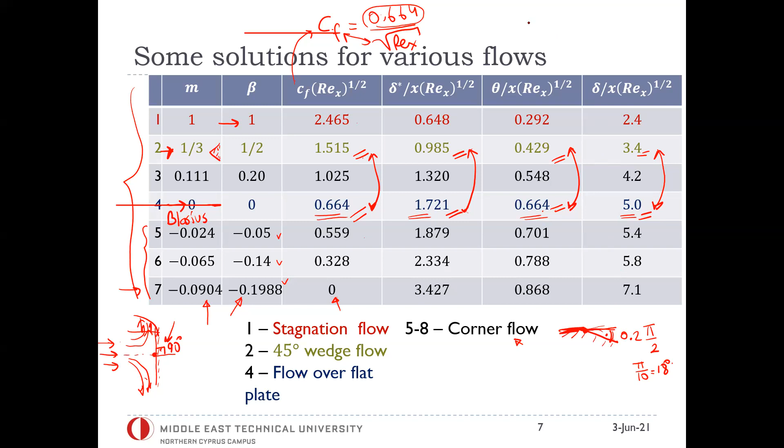Generally, when we are designing these types of corners or diffusers, for example, let's say we have this pipe, and then we would like to transition into a larger pipe, or larger channel. Now, of course, we have to connect them like that. So all these are kind of corner flows that we have here.

Generally, in a real life problem, it may or may not be laminar. It could be turbulent. Plus, there are more complications. So the general engineering rule that we use is that this half angle must be less than approximately 3.5 degrees. So the total deflection should be less than 7 degrees.

This is a much more restricted case compared to this one down here. But this is an engineering rule of thumb. So if you're in the business of designing different channels that are going to be connected to each other, and these are what we call subsonic diffusers, then we need to be careful about these corner angles and keep the total angle smaller than 7 degrees.

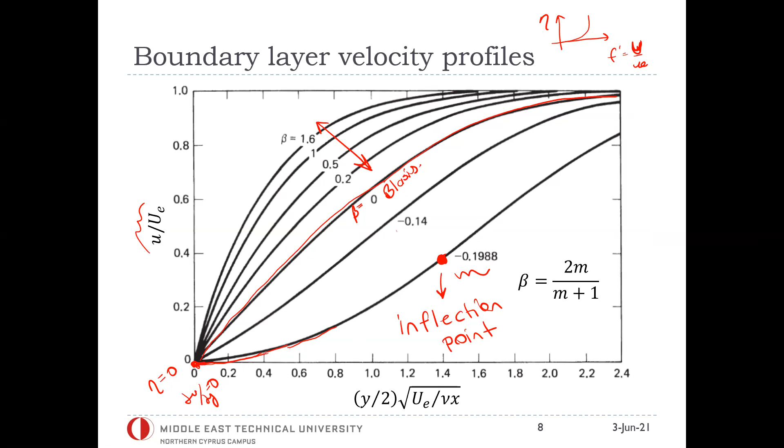Hocam, yes. I have two questions about the table in the previous slide. Hocam, in the beta and m equal to 1 case, we have the momentum boundary.

Theta? Yes. Momentum thickness. Is it low because the flow hits the wall and transfers momentum at maximum to the wall? I mean, theta is the momentum thickness, and therefore this function, theta over x times square root of Reynolds x, is a function, if you remember, telling us how theta grows over this specific type of boundary layer. Yes, how fast it grows. For example, if you compare the theta value of this flow with the theta value of the Blasius flat plate boundary layer, this is approximately half of Blasius. Which means that at a certain x coordinate, the momentum thickness theta will be half of what you would have on the Blasius boundary layer.

And the physical reason could be, let's say, very roughly explained as you explained. Yes, there is very strong momentum inflow coming, and there is a strong stagnation. You force the flow to go to zero velocity, and not only that, you force the streamlines to turn 90 degrees to the left and right, or to the top and bottom, and then the momentum gets distributed between these two. And the development of the boundary layer, I guess you can explain as you said: first a very strong reduction in momentum, and then regrowth of momentum.

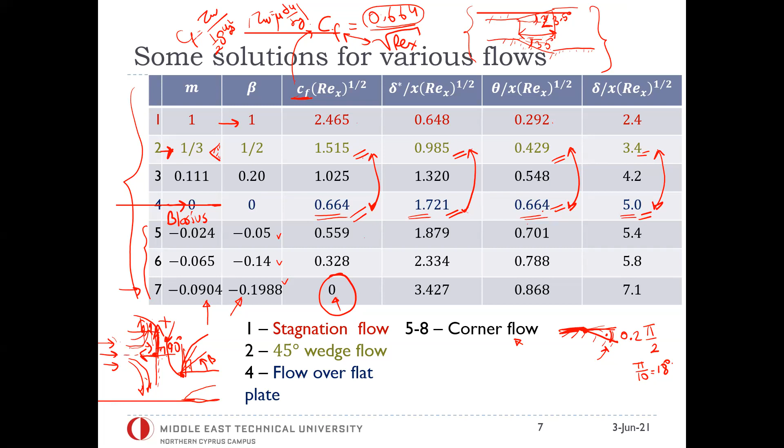My other question, hocam: in the tabulated CF values, after a certain m number we have CF as 0, and in this case the flow gets reversed at the wall. For this case, do we have CF as negative or continuously 0? After the separation point, let me go back here. After the separation point, the velocity gradient is negative, and therefore tau wall is negative. Therefore, CF is also negative. It doesn't remain at 0.

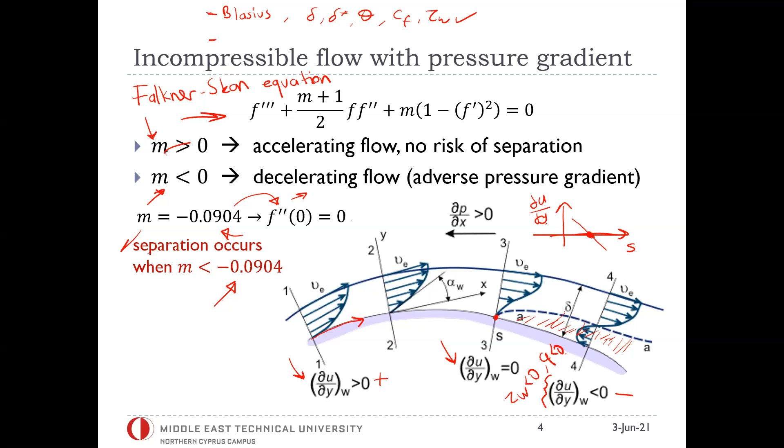Anyway, it's good that I'm on this slide right now to recap. We started with Blasius, and we extended it quite a bit with the Falkner-Skan equation, which is kind of a modified version of the Blasius equation. Based on this and on the introduction of the angle beta parameter, using a similar approach like Blasius, meaning after this coordinate transformation plus coming up with the similarity variable and the definition of the stream function, we now get this general equation, which potentially can represent all these kinds of laminar flows over all these different geometries.

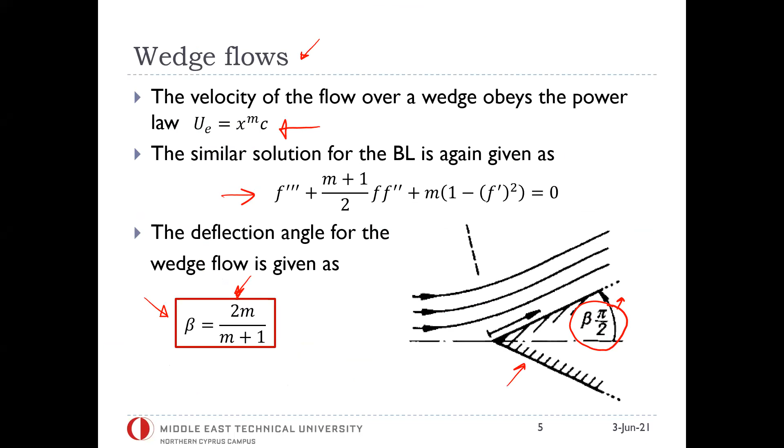For those cases, we generally use what we call integral methods for boundary layer analysis. So, what does that mean? From this point on, we will start learning integral methods. Until this point, everything that we learned was based on differential equations, right? First, reduction of the partial differential equation set to one single ordinary differential equation, and trying to obtain solutions for that. But now we will discuss something different. We call it integral methods for boundary layer analysis.

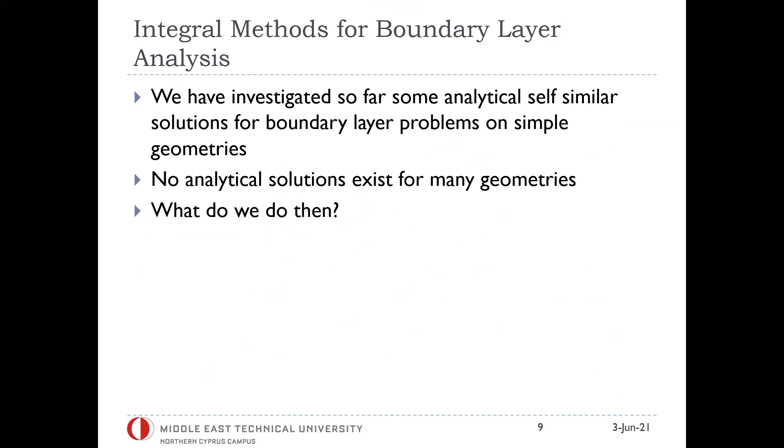Now, as explained here, what do we want to know for a general geometry? Why are we interested in this boundary layer theory? As we have been discussing since the beginning of this viscous flow related subject, the first reason that we are interested in is we need to know the skin friction coefficient, because it is related to the drag coefficient over that body. So viscous drag. So skin friction coefficient is of interest for us.

Plus, we would like to know if there is going to be any flow separation or not. And plus, we would like to know boundary layer properties. Here it's written delta, but we would also like to know delta star and theta, because especially delta star will help us, for example, if we want to use this effective body concept and make use of some inviscid solutions and everything.

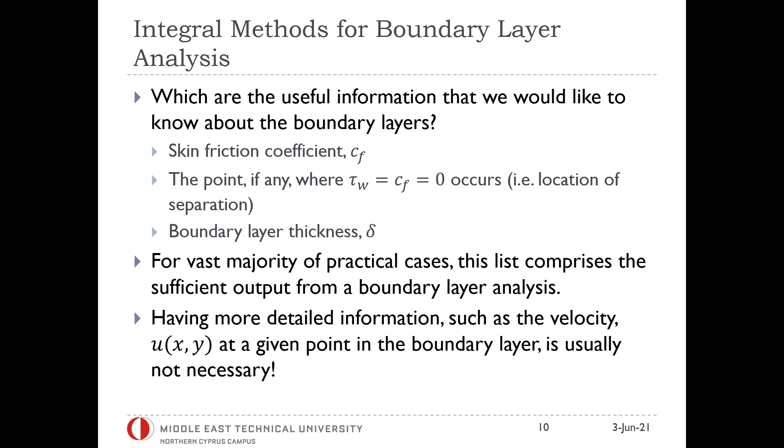So, therefore, in order to obtain this, now we propose another methodology. Everything that we are interested in, all these quantities, CF, tau wall, delta, delta star, theta, as it's written here, are what we call integral quantities. We obtain them as a result of some integration.

So at every x location we have only one single delta value or delta star value. We do not have, for example, a delta star distribution along y at a certain x. That's completely out of context. So these are integrated quantities. Delta star, delta, theta, CF, tau wall, everything is integrated quantities.

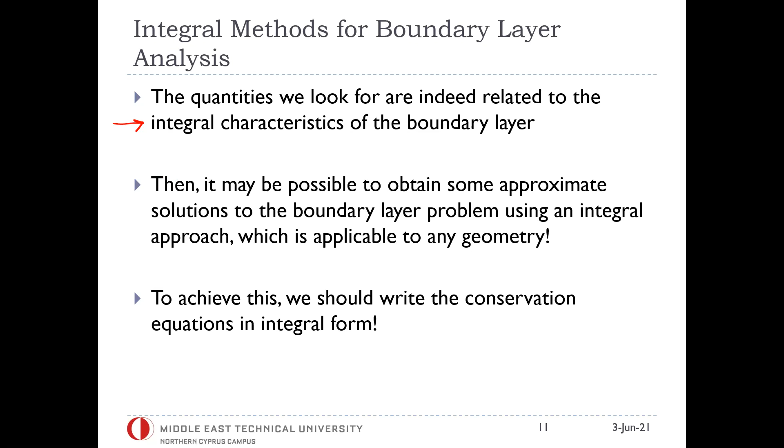So if we are interested in obtaining these integrated quantities, maybe we can develop what we call an integral approach, which could potentially be applicable to any geometry, not only to flat plate or wedge or those simple geometries, to any geometry that we can think of: airfoils, wings, aircraft. So in order to do this, our starting point is again conservation equations, but now written in integral form, not in differential form.

So therefore, we would like to obtain what is written here, the momentum integral equation for boundary layer analysis. This is something different. We are not really after obtaining an equation like Blasius or Falkner-Skan. We are after obtaining some kind of equation for integral quantities, not an equation for u or v or p, but for integral quantities starting from integral conservation equations.

How do we do that? It takes a few slides for its derivation. I would like to go over them, but I may not be able to finish them today. We will continue next week, but let's start.

So first, let's remember our conservation equations written for a boundary layer. Our starting point is the differential equations for a boundary layer. So boundary layer equations, not the Navier-Stokes equations in general, the boundary layer equations that we obtained after this order of magnitude analysis. So this is what we are seeing here.

We have the conservation of mass equation, du/dx plus dv/dy equal to 0, which can also be rewritten like that: du/dx is equal to minus dv/dy. Plus conservation of momentum along x looks like this for a steady flow, so we do not see the time derivative term. The y momentum conservation is again dp/dy equal to 0. Since we are dealing with reduced boundary layer equations, not the full Navier-Stokes, dp/dy equal to 0 is indeed the y momentum conservation. So these were our starting points.

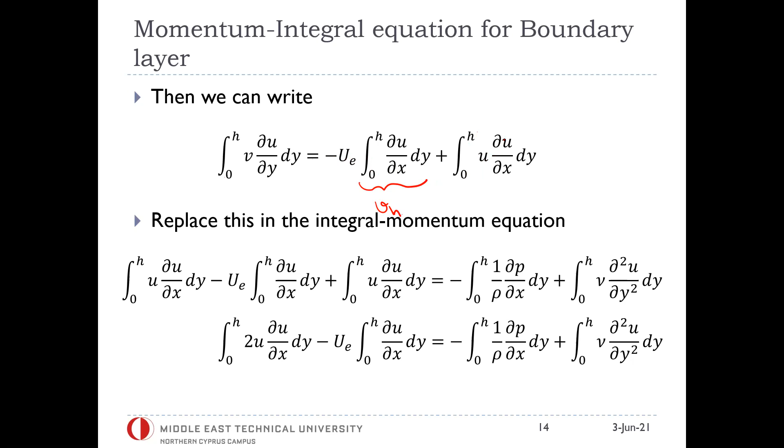Let me continue one more slide and we will stop for today. So basically we can replace that second term. Just to remind you again, we are trying to find a better expression for the second term in the equation. And now we reached this one. This 0 to h v du/dy can be replaced by this: minus u e times vh. But instead of vh, I write this one. So this is minus vh, plus 0 to h u times du/dx dy.

Taking this out of the original equation and replacing it with this equation gives me this one. As you can see, this was the first term in our equation, so this remains. The second term, we replace it with what we got here. So the first term plus the second term will be equal to whatever I have on the right-hand side. The right-hand side I kept the same.

So now I can combine, because look what we got here. First of all, this term and this term are exactly the same, and they are added. So I have two of them: 2 times u du/dx dy. So these two are combined here, minus this term. Okay, and then the right-hand side remains the same.

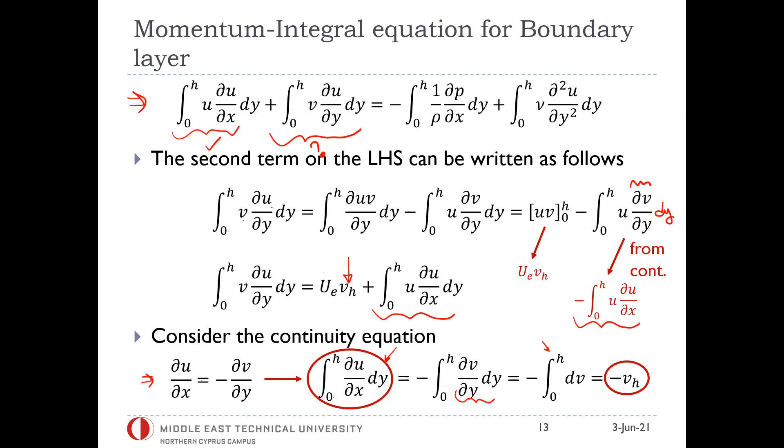Anyway, as I told you, we ran out of time. The derivation is not finished, but next time I will first summarize what we were doing and quickly go over the derivation again, quicker this time, since we already discussed it until this point. We will combine some of these terms together and then try to reach what we call the momentum integral equation

for the boundary layer. So let's stop at this point, but I will start with a summary of what we did regarding this derivation next week, and then we will continue our derivation. Okay, so let's stop here. Do you have any questions?